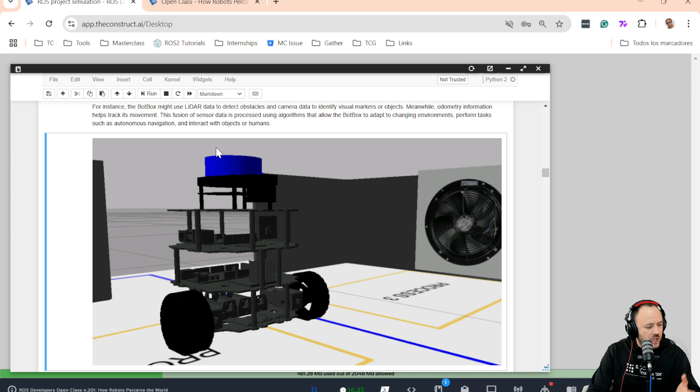All right. Then we are going to start by launching a simulation. So if we want to be able to start interacting with the sensors of the robot, we need to actually have something running, right? And for that, we are going to be using a simulation of the TortoiseBot, which you can see here. This is a simplified version of the simulation, okay? Then how can you launch this simulation? Very easy. You have the instructions right here. You need to execute these two commands and nothing else.

Why? Because this environment, the ROSject environment, already has ROS installed, already has Gazebo installed, and already has everything needed to start a ROS-based simulation, okay? So you don't need to worry about installing things. Just straight execute the commands and launch the simulation, okay? What we do need is to have a terminal, an available terminal or shell where we can execute these commands.

Then how to open a new shell? Very easy. You have to come here to the bottom part. Here you have all the different icons, and the very first one, right here, it says web shell. I don't know if you can see it properly. You can see it here in the stream also. So the first one, which says web shell, if you click on it, this is going to automatically open a terminal. This is just like a regular Linux-based terminal where you can execute commands. All right, nothing special here.

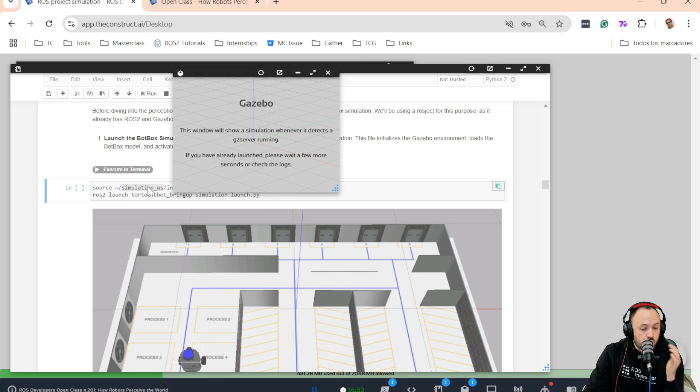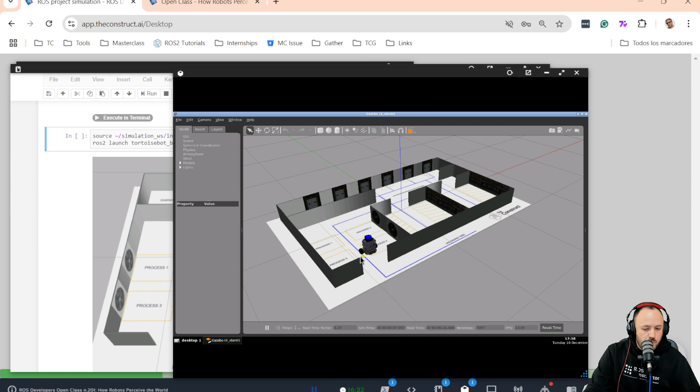The source command is important in order to source this specific ROS2 workspace, which is the one that contains the simulation files, and then the ROS2 launch command is the one that starts all the simulation and ROS related processes. Then after some seconds, you are going to see the Gazebo window pop up. And if everything goes okay, we are going to be able to see the simulation as I can see right here. This is the Gazebo simulation already running.

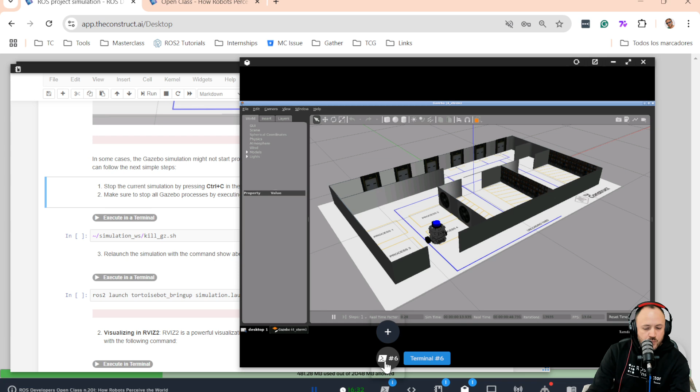Okay, now, in some cases, you might get some errors with Gazebo. So what I recommend you to do is, once you have the simulation running, we open a second terminal by pressing here on this add icon, which says create new terminal. Why? Because this one is the terminal where the simulation is running, so we don't want to stop it, close it, or anything. So we are going to open a second terminal to be able to continue working and executing commands. Then here, for instance, you can run a ROS2 topic list and make sure that you can see the simulation topics.

Okay, so here I can see the camera topics, the command velocity topic for sending velocities to the robot, the odometry topic, and the scan topic for the laser. To make sure everything is working, you can run the teleop twist keyboard program, which is the basic program provided by ROS to control and move a robot using the keyboard. Let me execute this. Using these keys on your keyboard, you can control the robot and move it around. Let me show you how I can control the robot, move it around, and rotate it. This tells me that my simulation is loaded properly and it's working.

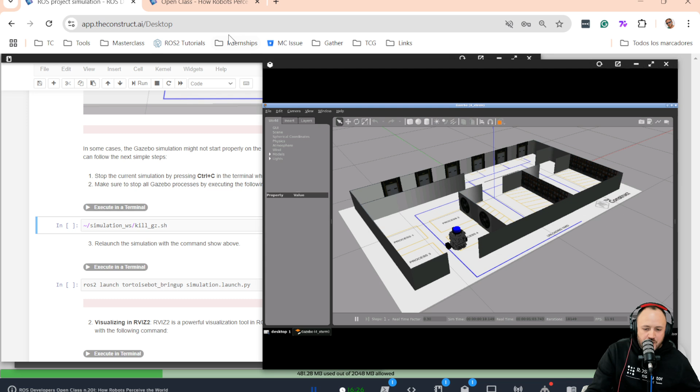We have a simulated version of the BotBox environment with our robot here, which has the sensors running, as we've seen. Let me run again the command ros2 topic list. And here I can see several topics, like topics related to the camera sensor, topics related to the laser sensor, and topics related to the odometry.

However, what happens if I try, for instance, to visualize the laser topic?

As you might know, ros2 topic list is the ROS2 command to list all the topics related to a robot, in this case the BotBox. But you can also access and read the information. That is done with the ros2 topic echo command, and then you specify the name of the topic. The proper term in ROS2 is to subscribe to a topic, which basically means to read the information being published into a topic.

So now I'm going to subscribe to the information of the laser. I'm going to start getting a bunch of numbers which are very hard to understand from a human perspective. I can see many numbers, many data, but honestly this doesn't make much sense to me. So what can I do in order to properly visualize the sensor information of the robot?

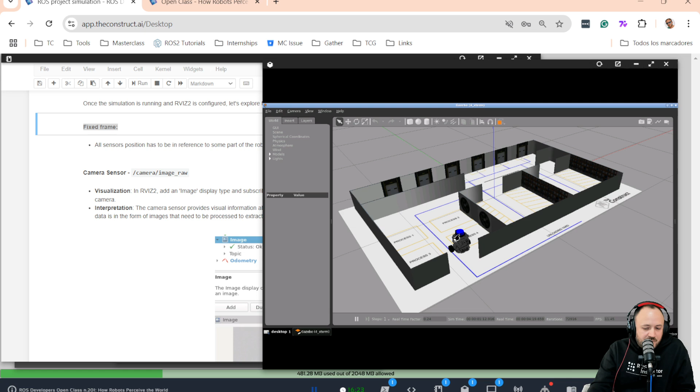First of all, it's very important to select the frame. This is a basic concept, but sometimes it can be a little bit hard to understand. In robotics, sensor data is always associated to a frame of the robot. For instance, the data that the laser is publishing is associated to a specific frame.

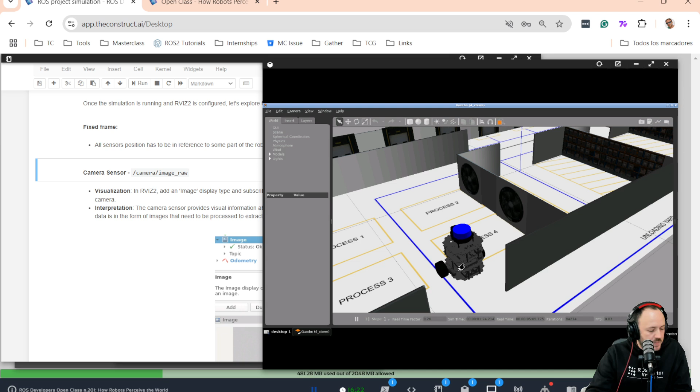In any case, let's not get into too much detail, otherwise we won't be able to advance. In this case, we are going to set the fixed frame in RViz, because whenever we visualize sensor data in RViz, we visualize it with respect to a reference frame. The reference frame we are going to select is base link, which is basically the base of the robot. The base link is going to be here in the center of the robot, approximately. So it's a very common reference frame for a robot, base link.

And now we are going to start adding displays. For instance, let's start with the camera sensor. Again, with the camera sensor we have the same problem as with the laser. We can try to visualize the data through a terminal, for instance, ros2 topic echo, and then let me select this one, copy and paste. This is the topic where the camera publishes. So again, I'm going to start seeing a bunch of numbers which make very little sense to me from a human perspective.

Let's try to add something here in RViz, a display, so that we can visualize the data published by the camera of the robot in a way which is easily readable for a human, for me in this case. So how to do this?

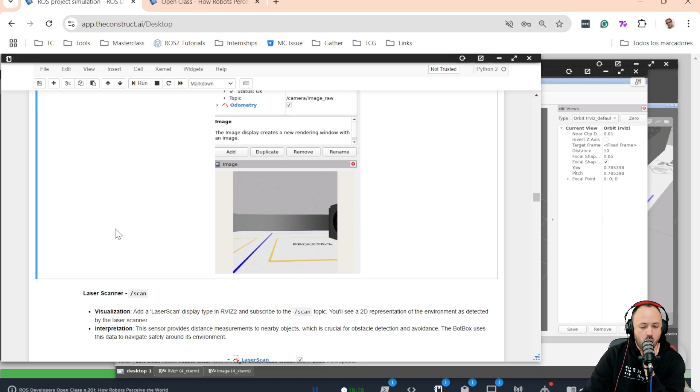For instance, let's continue with the laser. Again, we also saw that the laser topic contains just a bunch of numbers. But we can also visualize this data properly using RViz.

Let me try to move this back here if I can. No? Okay, let me just put it. Can't I move it back here? No. Ah, there we go. Okay, whatever, let me just remove it and add it again. I'm going to finish earlier. Where it is, image, there we go. And then topic, camera/image raw. Okay, there we go. Let's leave it here small, because now I want to add another display so I can visualize the laser data in a more understandable way.

For this, we need to use the laser scan display, which you'll find by clicking the Add button and scrolling down the list of displays. The one for visualizing LiDAR data, laser data, is laser scan. So we double click here, and again I need to properly configure this display.

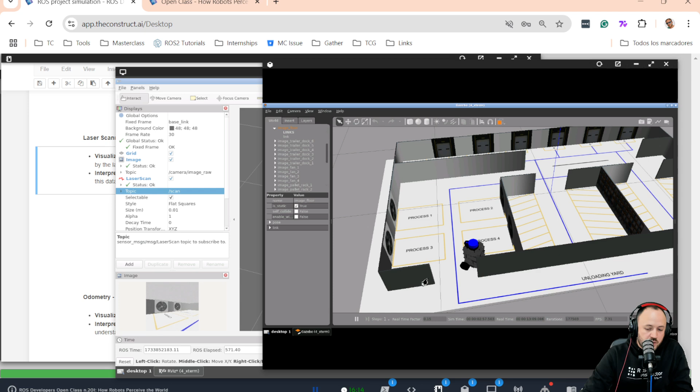These walls here. If we put it here, side by side like this, so you can see it properly. This is something more or less like this. This is the robot with the laser, and this is the environment, the room where it currently is. So this would be something like this, right?

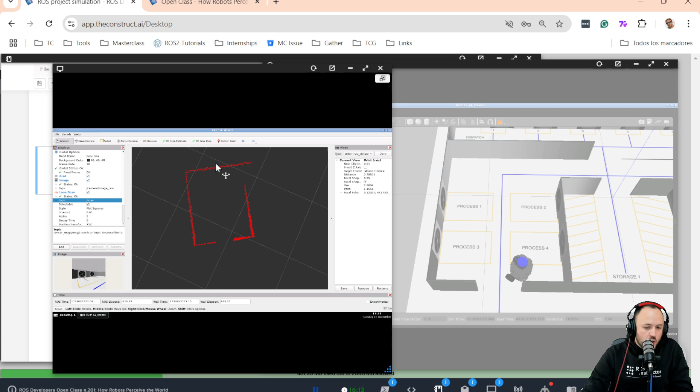See it now? This is the entrance here, down here, and then the walls, and the corridor at the top right corner. So this way it is much easier to understand. This is the data and the objects that the laser is detecting. This is a visual way, and it's much easier to understand and interpret the sensor data.

Let me have a quick look here at the comments. I'm not getting... can you please repeat? Can you repeat that part, please? What part do you mean, guys? Which part do you want me to repeat?

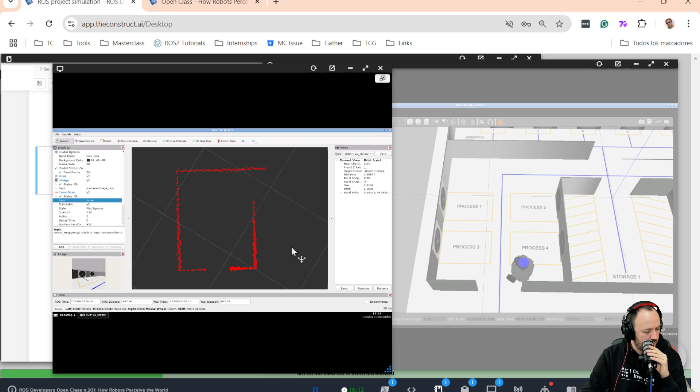Miguel says, when I click on topic, the camera topic doesn't appear. You have to click, Miguel, on the right part, not here, but here, on this right side. If you click here, you should see the menu with the topic options.

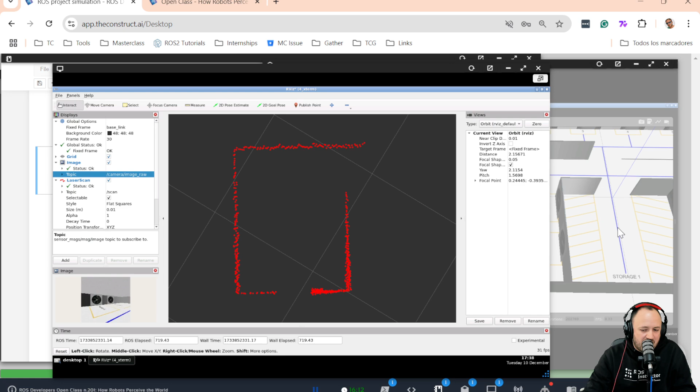Dustin says, I selected topic scan, but RViz 2 is showing 0 points from 0 messages. Okay. In that case, Dustin, my guess is that probably your simulation is not working properly. Okay? So just try restarting the simulation, as I explained it earlier. Because that could be a reason for you not being able to see the topics here in the simulation. Yeah?

And ROS 2 topic echo scan is showing messages, you say. Okay, then that's something different. If ROS 2 topic echo scan is showing messages, then try removing it and adding it again, because it doesn't make much sense. If you can see the messages in the terminal, you should be able to see them in RViz also, unless you changed some configuration here or you are not using the base link fixed frame. So make sure that the fixed frame that you are using is base link and not another. This is the very first step that we did. Reference frame has to be base link.

If we change and put, for instance, Odom, which I don't know, I think it's map, the default one, yeah? If you have map here, which is a frame that doesn't exist in this simulation, then you are not going to be able to see any information. So you have to put one frame which is known for the camera. Okay, then it was that problem, the fixed frame, right? Okay, what else?

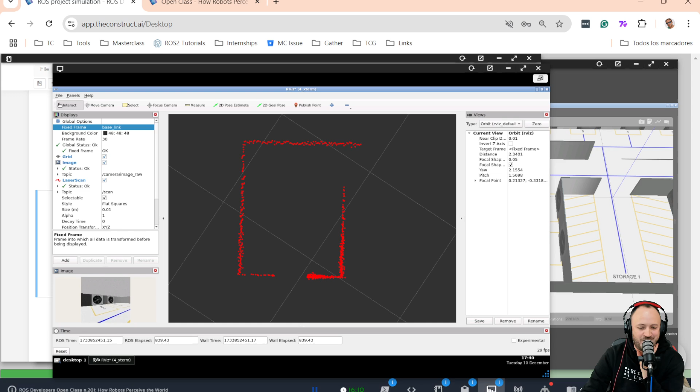Odometry. Odometry is another very important sensor that we already introduced that also can be visualized using RViz, as all sensors in robotics. For the odom, it's pretty simple. Again, same process. You click on the Add button to add a display, and then look for the odometry display, which is right here in my case. Double click, and same process. Always it's the same. You add the display, and then you have to configure the display for your specific robot.

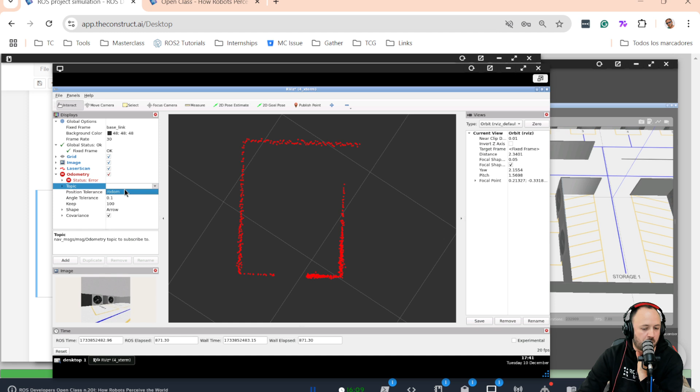So in my case, I go to topic, to the right side, I click here, and then I select the proper topic, which is odom for my robot. And then you are going to see this here. My suggestion is that you uncheck the covariance, because it's what's adding this kind of mess here. If you unmark the covariance box, it's going to be much more clear.

And then here we can see the current position of the robot, which is right here, in the right side of the entrance and facing this specific orientation. If we look at the simulation, we can see that, yes, the robot is here in the right side of the entrance and with this specific orientation, looking in that direction. And again, if I move the robot, I'm going to see this being updated.

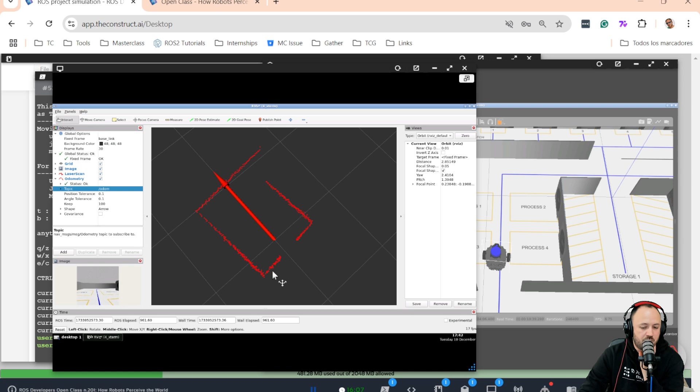Let me move the robot around again a little bit. Let me move it forward here to the center and then rotate to the right a little bit, facing the north of the room. There we go. Rotate a bit more. Okay, and then let me stop here. And if I go back to RViz, I'm going to see how the odometry of the robot has properly updated according to the new position of the robot.

And we have one more, which is the robot model. But actually, this is not a sensor, but it's a very useful tool that RViz provides. Every simulation and real robot also publishes the robot description into a topic named robot description. What does this topic contain? It contains the URDF definition of the robot. I'm not going to enter into details because it's not the focus of this class. But this allows you to visualize the robot properly. And again, it's very simple.

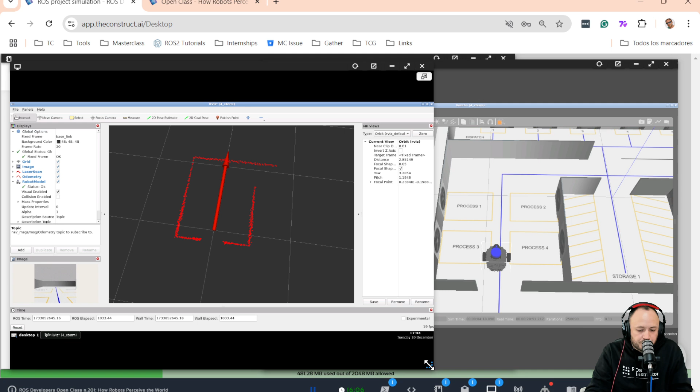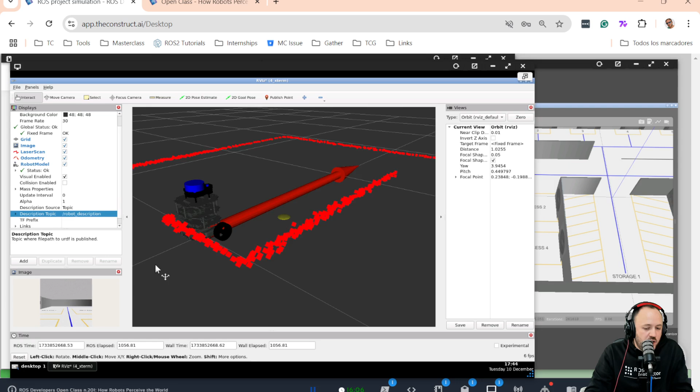Same process. We go to add. We look for the robot model display, which is at the bottom part, double click, and then we need to configure the description topic, which is at the bottom part here. Then we click on the right side and we select robot description. Press enter, and what does this do? As you can see, this adds the URDF definition, the visuals of my robot. And this is very helpful also in terms of visualization because we can see exactly where our robot is.

This is not a sensor, but it's an interesting tool that ROS provides and that we can take advantage of using RViz, yeah? So here we have a complete display with our robot, the odometry, the laser readings, and the camera.

My suggestion now is that you do the following. You go to File, Save Configuration As, and then here let's go to User, ROS2 Workspace, SRC, and then you can give a name to the file, whatever you want. For instance, BotBox. Save. And now, whenever you open again RViz, let me stop RViz, because configuring and setting all this takes some time, right?

So now, whenever you open again RViz, you are not going to have to do all this process over again. Now, you can just go to File, Open Configuration, and you look for the file that you have just saved, which is here, BotBox RViz, and directly load it, and you have it available. Okay, from scratch, without having to do it all over again.

Okay. So far, so good. Have you been able to complete the visualization process for all the sensors in RViz? Yes, yes. Okay. Awesome. Okay, then let's continue.

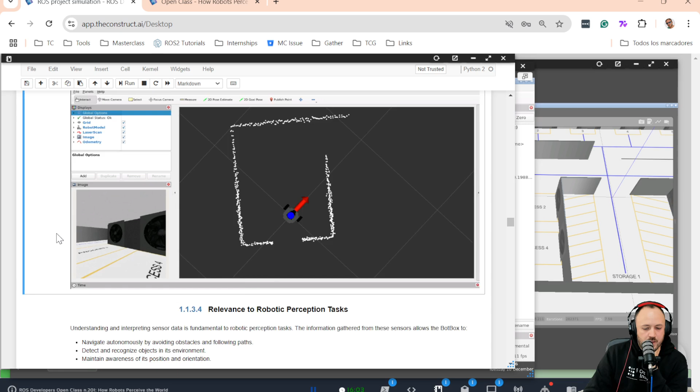Well, actually, let's do one last thing, which is to change the color of the laser readings. This is not mandatory. I'm going to do it just for visualization purposes, because later I'm going to add another marker in red. So let me change here the laser. You don't need to do this if you don't want, okay?

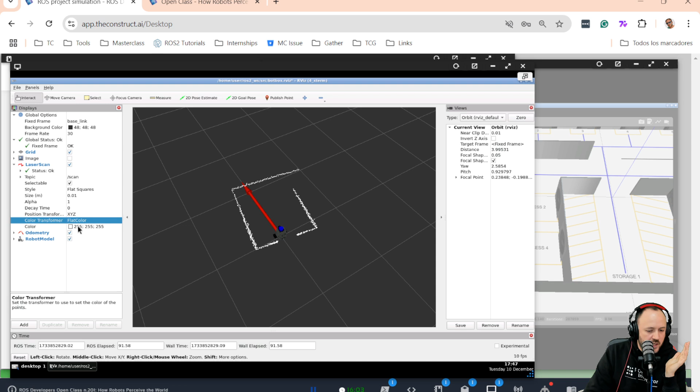This is just optional. I'm going to go here to the laser configuration and then change the color transformer to flat so that it shows white. Actually, here you can select in which color you want to visualize it. You can put it, for instance, yellow or whatever you want.

All right. Then what I want to do now is the following. I want to create some program that actually uses the robot sensors for something useful. What are we going to do? In this practical example, we are going to use the laser sensor in order to detect walls in the environment. For this, we need to do several things. And I have provided already here the code, a basic version of a ROS2 program that does this.

Then, altogether, let's now start by creating a new file. We need to create a new file here in ROS2 workspace, which is named like this. In order to do this, let's open the code editor. The ROSject environment also contains, of course, a code editor, which you can open here by pressing on the second icon in the bottom bar, which says code editor.

This is going to open a code editor, which is going to give you access to all the different folders, workspaces, and files which are inside this ROSject. I don't know why this is showing like this. So let me refresh. There we go. Then in this case, we are going to go inside ROS2 workspace, SRC, and here is where we are going to create our new Python file.

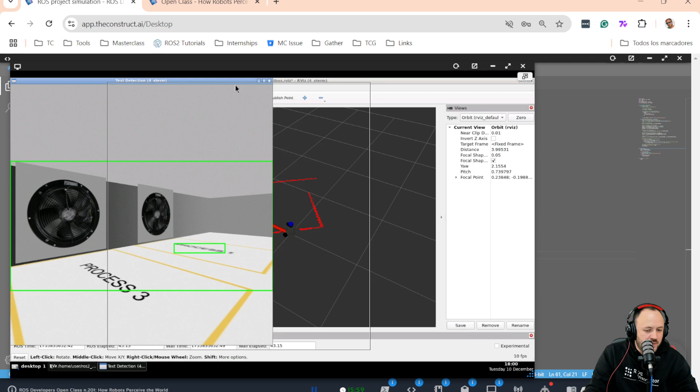And then here I'm going to execute my program, python3 detect_text. Okay, never mind. And now if I come here to the graphical tools, I should see something appearing in a moment. There we have it. So as you can see, this is a new window that is appearing. This is basically an OpenCV generated window. OpenCV is a library for image processing, in case you are not familiar.

And as you can see, it's kind of detecting some things. It's not working very well, but for instance, down here it is detecting some text. This one it's not detecting it, but we can try to move the robot a little bit and see if it improves. Actually, here we can already close RViz because we don't need it. So let me just run here ros2 run teleop_twist_keyboard teleop_twist_keyboard.

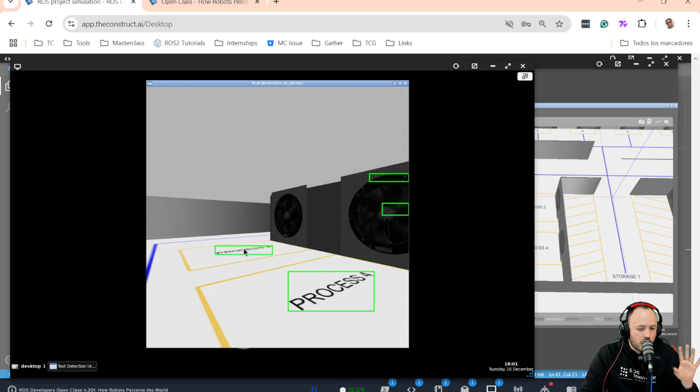Let me move the robot a little bit around here. For instance, let me move here to face these process 2 and process 4 sections. Let's see if the program can see something here. Let me go back here. And as you can see, it's detecting this process 4, also this process 2 here, more or less well, okay? You can see some errors here on the right side. But this is a starter code, okay?

So what I want you to do is to analyze properly this code, understand what it is doing. You have some tips here. Basically, very quickly, we are subscribing to the camera topic in this case, and then we are using OpenCV in order to detect edges. We are using the Sobel filter to detect edges. And then we are doing some filtering, but I'm going to leave that for you so that you can properly check what's going on here. We are using OpenCV for that.

You are going to learn how this properly works, and you are going to be able to improve the code in order to make it much more reliable. You are going to see that right now it's working pretty well, but it can be improved. That I'm going to leave for you as homework.

And as a last thing before closing, I want to show you a real robot example. So from a ROSject environment, you can also connect to a real robot directly, without having to do anything additional. In this case, I have created a lab for the BotBox, and I can connect just by clicking this button here. Let me do it right now.